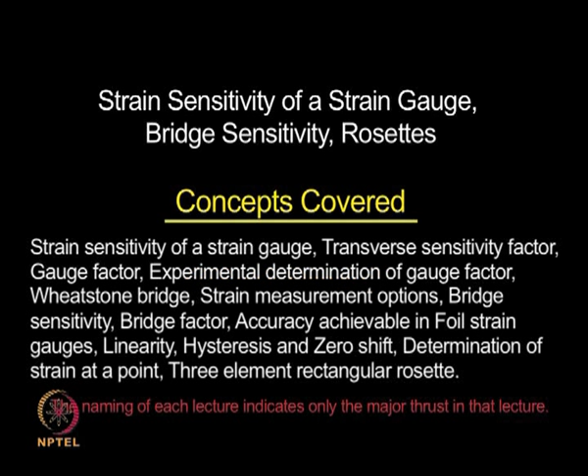We started our discussion on the method of strain gauges to measure strain at a point. You need a material with very high resistance so you can take a small speck of material and find the strain at a point of interest. I need a minimum length of wire to get changes that can be measured, but a long wire cannot be pasted on the specimen directly. I have to make it as a loop, a grid, to make a strain measurement. A single strain gauge only provides a component of strain along its gauge length. To measure strain as a tensor, say on a free surface, I need 3 independent quantities, so I need at least 3 strain gauges to measure the state of strain at a point.

You need to understand these two differences. In the last class, we developed the strain sensitivity of a single conductor, to understand the role of various parameters. I also mentioned that in strain gauge instrumentation, any thermal influence needs to be looked at very carefully, since we are measuring very small quantities. So any small changes can have a significant effect. Now we look at the strain sensitivity of a strain gauge.

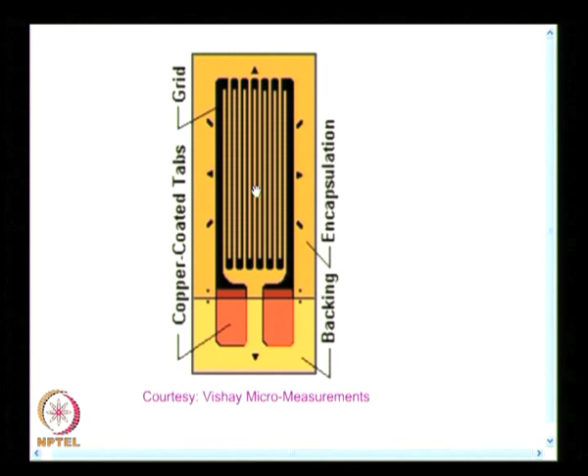As engineers, we need to bring in approximations. First observation is whatever resistance change dr by r occurs will be a function of the axial strain, the transverse strain, as well as the shear strain. In many problems we first neglect the shear effects, because shear effect is always there but its influence is quite small. So as a first approximation, let us neglect it and proceed; we will follow the same route here also.

In general, dr by r is equal to S_a into epsilon_a plus S_t into epsilon_t plus S_s into gamma_at. Note how the subscripts are denoted here: I use a small letter a, so the moment I use this, I am talking of a strain gauge and not a conductor. For the conductor, the axial sensitivity is given as S capital A. When I take it as a grid, the axial sensitivity is given as S_a. But even this kind of expression is not convenient for users.

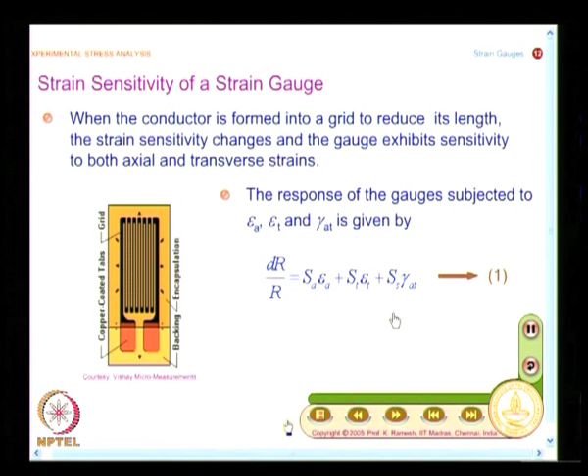I caution, when you are doing a strain measurement, you are talking of micro strains, which is 10 power minus 6, and you will also have to measure the change in resistance, which is again 10 power minus 6. So it is a very small quantity. If you recognize this fact, it will go a long way in respecting the procedures given by the manufacturer, because many times you do not want to follow a procedure, you want to quickly go and make a measurement. That will not do when you want to do strain gauge instrumentation. You should know what are the constraints that you have.

Now we look at how we simplify the set of expressions. As I said earlier, we start with the first approximation that shear effects are neglected, so Ss is small and can be neglected. We have also done one more modification: we have taken out S_A from this and brought in another factor called K_T, defined as S_t by S_A. This is just out of convenience, and what you find here is the change in resistance to the resistance of the gauge is now equal to S_A into epsilon_A plus K_T epsilon_t.

If you go and look carefully at the specification given by the strain gauge manufacturer, he would provide you what is known as a gauge factor. He will also provide you the transverse sensitivity factor. That is how manufacturers give out their parameters defining the strain gauge, and that is where you have what is defined as K_T. Typically we want to keep K_T as small as possible while designing the grid. We will also see later, by making K_T almost equal to the Poisson ratio of the base material, you can have what is known as a stress gauge.

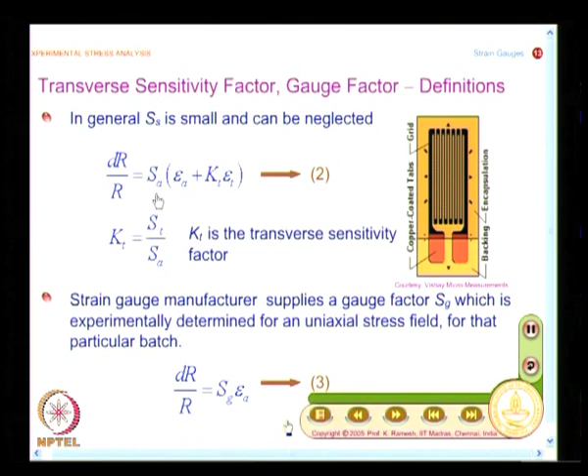And we have to look at what is the interrelationship between Sg and Sa. This Sa, St, Ss comes directly from our understanding that we take a conductor, perform an experiment, pull it, and then determine the strain sensitivity. Now you adopt the same thing for a grid. The grid is sensitive to axial, transverse as well as shear. So you bring in three factors, but from the user's point of view, he does not want to look at all these quantities. He wants a much simpler expression, also given by the manufacturer, where he simply says dr by r equals Sg into epsilon_A.

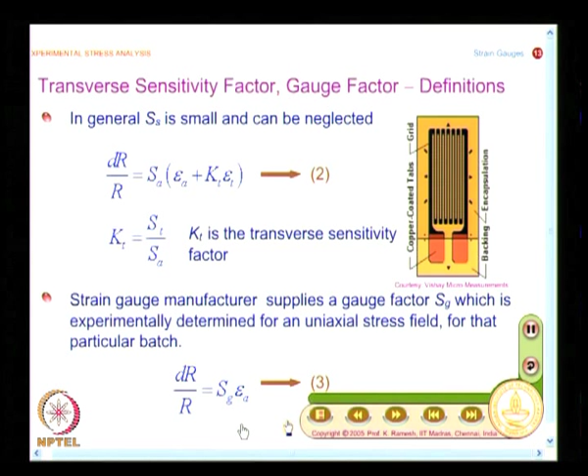Once you use this expression, you should know what are the constraints behind it, because Poisson's ratio has a role to play in all the experimental technique. What does the manufacturer do? He takes a cantilever, puts the strain gauge, and for a given load or a set of loads, he would find out the strain. From the analytical solution, he would be able to correlate and establish the parameters.

When you do an experiment like this, the Poisson ratio of the calibration material comes into play, because I have always said a cantilever beam experiences uniaxial stress but biaxial strain, you should never forget that, and the transverse strain is controlled by the Poisson's ratio.

So, without your knowledge, Poisson's ratio enters into your strain gauge instrumentation. It is very important. If you only use the equipment and read the strain, you miss out how the whole technology is developed. You should know the theory behind it.

Since I know the axial strain, I can find out the transverse strain simply as epsilon t equal to minus nu naught epsilon A, and for the calibration beam material, nu naught is given as 0.285, and you get an expression for Sg as a function of axial sensitivity and transverse sensitivity, the transverse sensitivity factor. So, I have Sg equal to Sa into 1 minus nu naught kT.

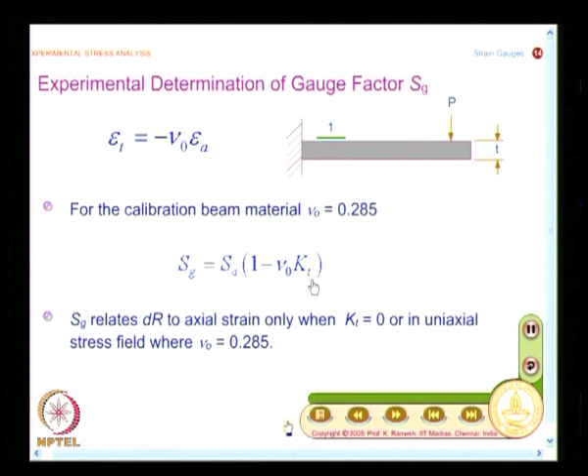I have been saying that you need to measure very small quantities, and how do you measure the change in resistance? In your high school physics you would have seen the use of a Wheatstone bridge. It is a very popular and simple, yet robust, method of measuring small changes in resistance.

And what you have here, I have 4 arms of the bridge. I have arm AB, BC, CD and DA. And what I do is I supply voltage between the points A and C, and I measure the potential difference at points B and D, that is what I measure.

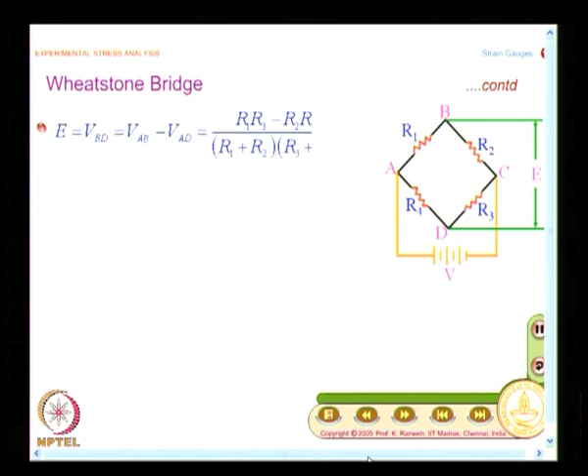In your earlier class you would have also seen how to find out the voltage AB and voltage AD, and these are given as these expressions, but our focus is different. Our focus is what happens when the resistance changes slightly.

Whenever I do any instrumentation, I initially balance the bridge, and while balancing the bridge I essentially make E equal to 0, that is VBD equal to 0. That gives me an expression, VBD as R1 R3 minus R2 R4 divided by R1 plus R2 into R3 plus R4 into V. When I make E equal to 0, this gives me a condition R1 R3 should be equal to R2 R4.

So, when I construct a Wheatstone bridge, I need to maintain this relationship. What should be the individual values of R1, R3, R2, R4, which would give me an optimal response of the Wheatstone bridge? I would like to have an optimal response, because I am measuring a very small quantity. So, I must look for every single effort to maximize the signal.

If I have to maximize the signal, I should understand how a Wheatstone bridge functions, and I should also bring in my understanding of solid mechanics in strain gauge instrumentation. So, the first condition shows when the bridge is initially balanced, I get an interrelationship between the resistances. We will see further what way R1, R3, R2, R4 should be by looking at the performance of the bridge.

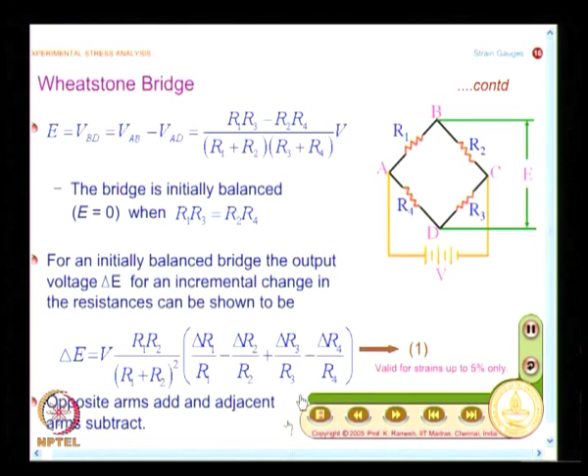And this, if you want to maximize, I can make this minus to positive. If I have opposite strains on adjacent arms, I can make this quantity equal to 4. So that way I will amplify my signal. The idea is you are measuring a very small quantity and we should always look for ways to increase the signal output. This is also one of the requirements, particularly in transducer design, they would have this bridge factor as 4. So now we look at the performance of the bridge.

Before we go into that, we look at what are the strain measurement options and then we will go and optimize the bridge. What way can we do this? I can measure the change in EMF directly and relate it to strain. This is useful for both static and dynamic strain measurements, absolutely no difficulty.

But for me to do that, the bridge has to be initially balanced before making any strain measurement. So this is very important. Initial balance of the bridge is a very important criterion, and this becomes very significant when I have thousands of channels. I must have electronics and multiplexing type of situation where I am able to balance and then start doing my measurement. That is where the instrumentation is now focusing.

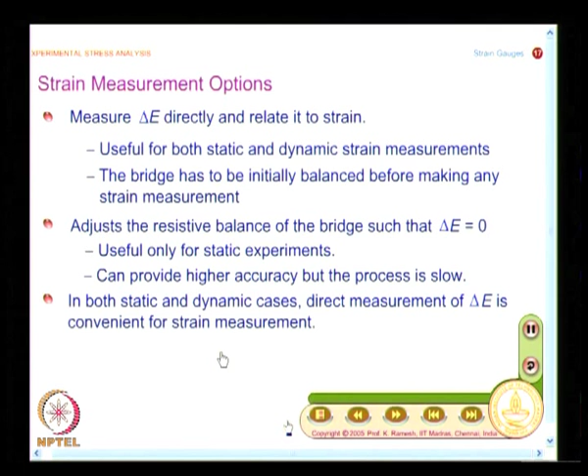The other approach is to adjust the resistive balance of the bridge such that delta E equals 0, but it is slow, it will take some finite time for you to do. This is good for static experiments, but it can provide higher accuracy. Nevertheless, for both static and dynamic cases, direct measurement of delta E is convenient from a practical viewpoint, and that is what we will try to do. So now we will go and look at how I can improve the signal from my Wheatstone bridge.

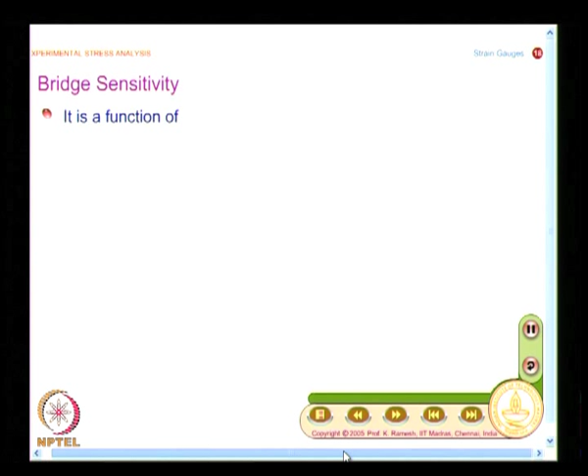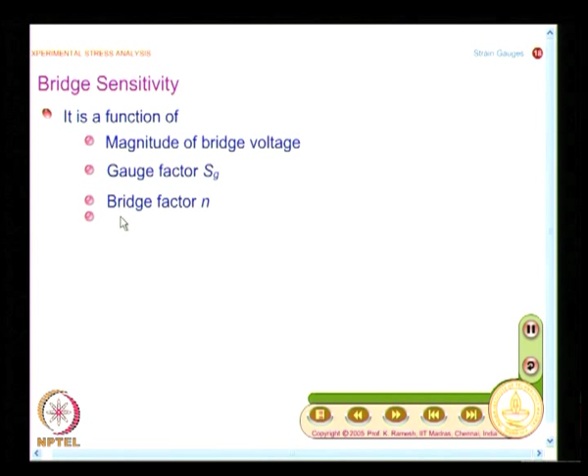So, I have the bridge sensitivity, it is a function of magnitude of bridge voltage, gauge factor Sg, bridge factor N and the ratio of resistance R2 by R1.

See, what we want to look at is, your initial balance only gave me a condition between the resistance. Now, I will find out for maximum sensitivity, what should be the value of the ratio R2 by R1.

And we write this expression delta E in a much convenient fashion. I have this as V into R1 R2 divided by R1 plus R2 squared, and the long expression is replaced by n, which I call it as a bridge factor, and you are essentially measuring delta R by R.

And delta R by R can be replaced by Sg into epsilon. So, if I have to maximize my delta E, one can also say I will have a very large value of Sg.

This is one of the focus in semiconductor gauges, but if I want to measure strain both in elastic and plastic regions without altering the instrumentation, we have seen it is desirable that gauge factor is around 2. So, most of the problems, whatever the strain gauge that you have, you will find the gauge factor is around 2, 2.1, that is how you will have it.

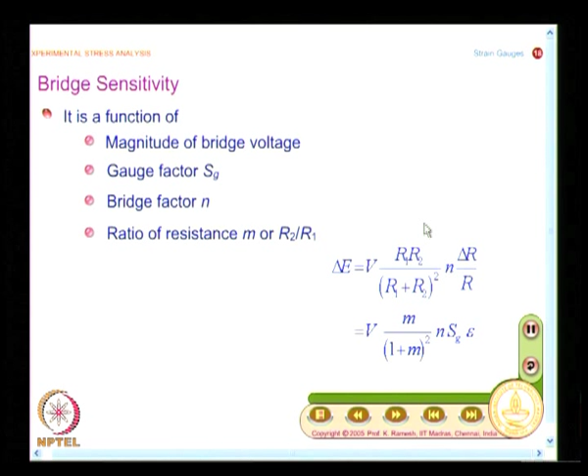And if you look at the current capacity is very small, we are only sending 0.1 ampere, and then the voltage that you are going to energize the bridge is only between 3 to 5 volts, you are not supplying a very high voltage. So, it is a very small voltage.

So, now what I will have to do is, with these constraints I must maximize this term m by 1 plus m whole square. So, if I look at its variation, how does it appear?

So, what I have here is for constant voltage and bridge factor n and the gauge factor Sg, you find the ratio m by 1 plus m whole squared reaches a value of 0.25 when m equal to 1.

So, what does it translate to? You want 4 arms of the bridge to have equal magnitude of resistances. So, that is how we will construct a Wheatstone bridge.

And we also have configuration where I will just use only one strain gauge, or I use 2 strain gauges, or I use 4 strain gauges. That is how I will make the bridge depending on the requirement. So, when I do that, I will be essentially playing with the factor n.

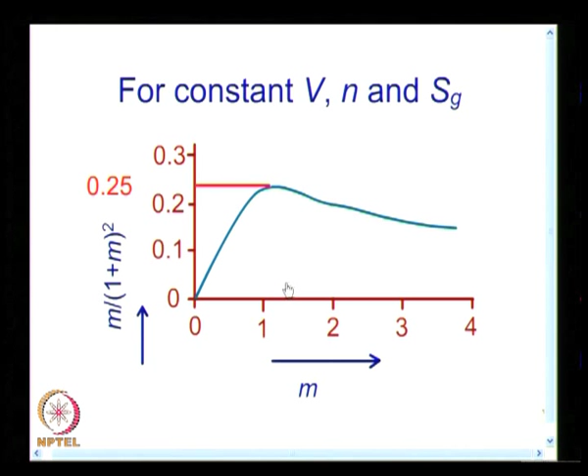So, if you want to have a better sensitivity for the bridge, ensure that each arm of the bridge has same resistance to start with.

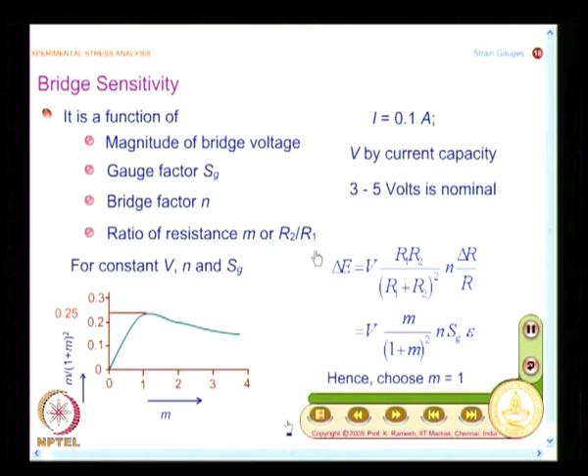And another caution is, we will also have a discussion later, connecting only one strain gauge poses lot of difficulties. So, it is better to avoid a quarter bridge configuration from minimizing the role of thermal influence. We will see that in detail later.

And there is also a via media. If I have to use only a quarter bridge, how do I reduce the errors? We will look at a 2-wire circuit and 3-wire circuit. A 3-wire circuit will minimize the thermal influence significantly.

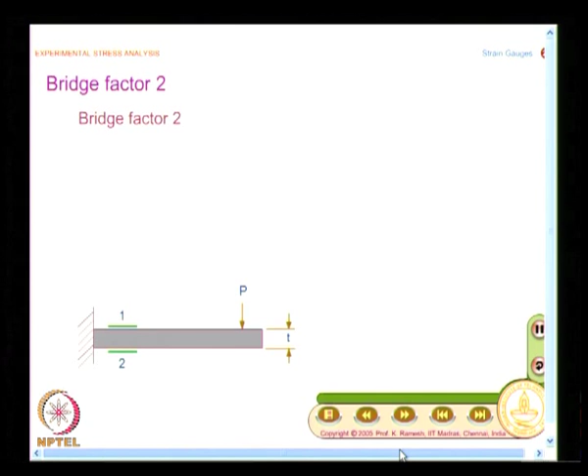When I have only one strain gauge, what happens? The bridge factor is only 1, and this is good enough for strain measurement, but when I go for transducer application, I always go for a full bridge to find out the maximum signal, and here I have a bridge factor of 2, and you bring in your understanding of solid mechanics here.

What is done here? Suppose I connect strain gauges on the top surface and bottom surface to opposite arms, what would happen? For any load, I will have 0 strain. You should not think that my strain meter has gone bad. It is not so. It is how you have connected the strain gauge to the Wheatstone bridge. It is also equally important. In strain gauge instrumentation, how you place the strain gauge and how they are connected in a Wheatstone bridge, both are important.

In most strain measurement scenarios, what do you do? You decide that this is the critical location, so I invariably put a single strain gauge and connect it to my Wheatstone bridge. You may essentially use a quarter bridge. Only in situations where the signal is so low that you want to amplify it, you may find methodologies to amplify the signal.

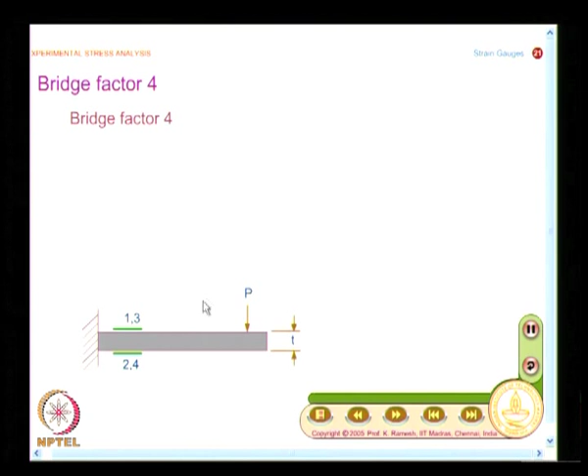Suppose I want to use bridge factor as 4 with the same cantilever, how can I go and do it? I can paste, instead of one strain gauge on the top surface, 2 strain gauges on the top surface and connect them appropriately.

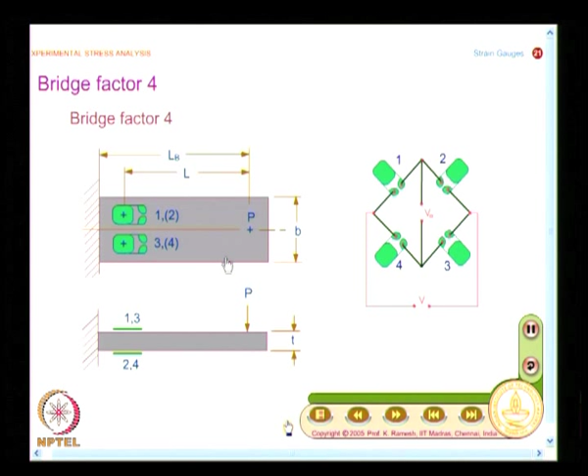This is very important, and you will be tested in the examination on this aspect, because pasting the strain gauge requires applying principles of solid mechanics - you should know how a beam behaves. You should know that when the beam bends, the top fiber will be in one state of stress and the bottom fiber will be in an opposite state of stress. And how they are connected is a very important and subtle piece of information in strain gauge instrumentation.

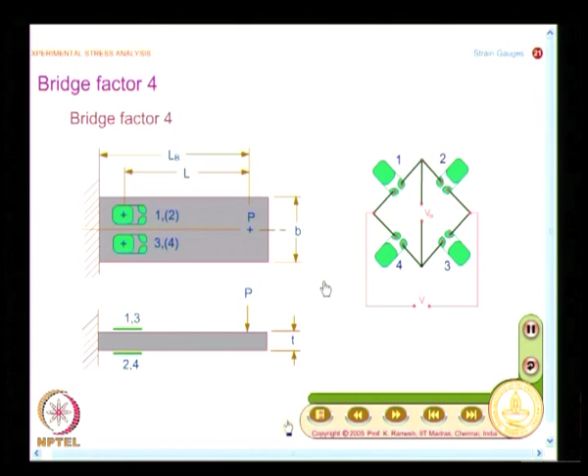I am going to give you one more example, which I leave as a home exercise. I have taken a shaft under torsion, and I want you to identify how to place strain gauge 1 and 2, how to place strain gauge 3 and 4, and how to connect them in the Wheatstone bridge to measure the torque.

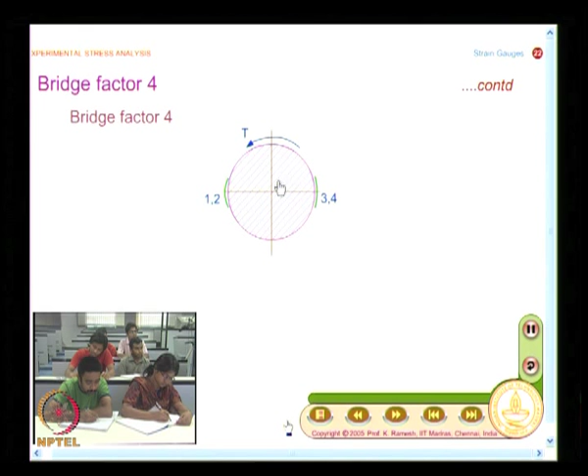You have to notice a strain gauge measures strain along its gauge length. So when deciding how to place the strain gauge to measure torque, you should also look at what alignment to use when pasting. All this knowledge you have to get from your basic understanding of mechanics of solids. You should understand how a pure shear state can be expressed, and use that knowledge to identify the orientation for pasting.

Not only this, how do I connect it? It is very tricky, people can make mistakes in this - how to align the strain gauge and how to connect it on the Wheatstone bridge. So I leave this as a home exercise, and we will see in the next class what answer you have got.

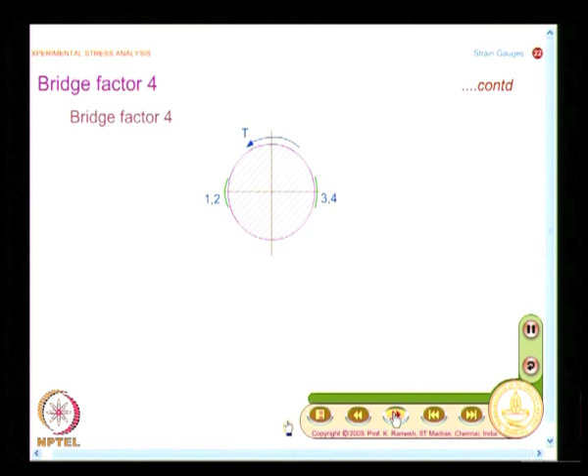What I have been mentioning is strain gauge instrumentation. We are looking for measuring small quantities, so we have to pay attention to every minute detail. We looked at strain sensitivity of a conductor, then graduated to strain sensitivity of a grid, and then we also looked at bridge sensitivity. In bridge sensitivity, we understood that if I do a strain gauge instrumentation, each arm of the bridge should have the same resistance to start with.

Using the principles of solid mechanics, I can have a bridge factor up to 4. This may be good enough in the case of transducer applications. In normal strain measurement, you may paste just one strain gauge. And what is the level of accuracy that we can think of? This depends on what way we get individual accuracies of the various factors influencing the strain gauge instrumentation.

And what is the accuracy achievable possible? Foil strain gauges can be produced with gauge resistance accurate to plus or minus 0.3%. And one of the first steps in strain gauge instrumentation is you would measure the resistance of the gauge.

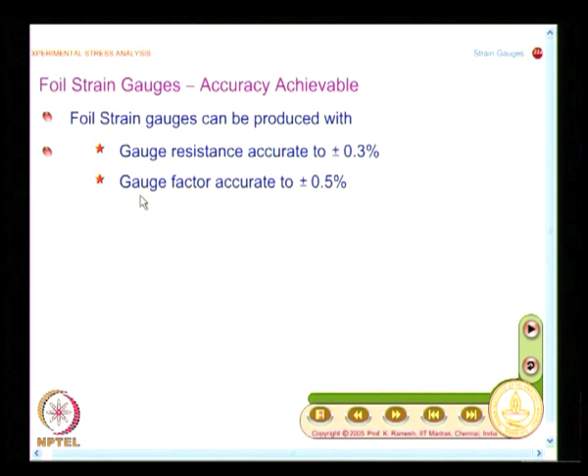You also need gauge factor measurement, because you may have to set the knob of your strain gauge instrumentation to the gauge factor, because gauge factor essentially works like a multiplication factor, and if you do not set the knob properly, you will not be able to interpret the strain. Gauge factor can be obtained with an accuracy of plus or minus 0.5%, reasonably good. In the case of brittle coating, the failure strain accuracy is only plus or minus 20%. So in strain gauge instrumentation, the accuracy levels are much higher.

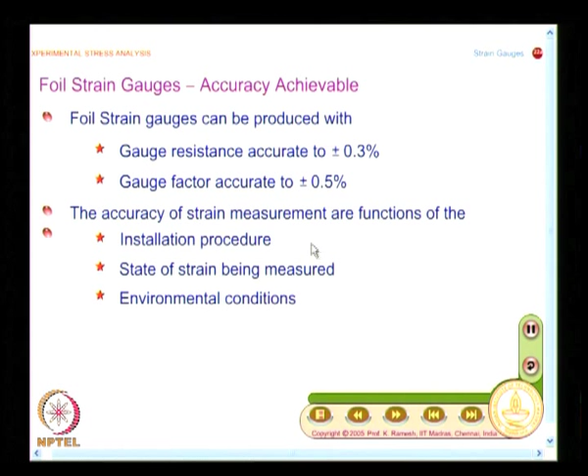And the strain measurement accuracy depends on what factors. Though I get the gauge resistance and gauge factor very accurate, if I do not do the installation properly, my entire strain gauge instrumentation can be faulty. Installation is a very important step, and you need trained technicians to do that. So this is one factor.

The second factor is what is the state of strain being measured. We will also see different types of strain gauge patterns that will give you an indication of how the problem becomes complex when I have to find out what I should do. Suppose I have a bending scenario, what type of gauge configuration I should use, I have to select.

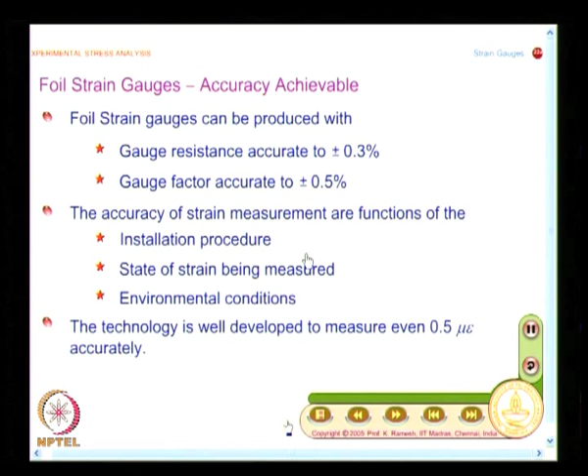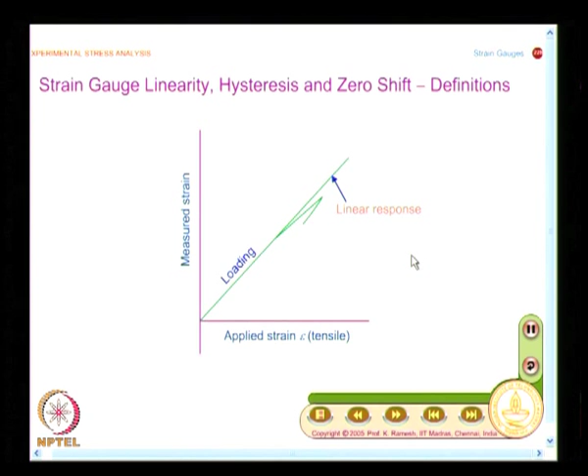And finally, your environmental conditions. You have to take special precautions in aggressive environments. And what you will have to keep in mind is accuracy in measurement is closely related to technology, and you should be happy that technology is now very well developed to measure even 0.5 microstrain accurately. That is an achievement. For you to get that, you need to be very careful about installation and all the other recommendations that the manufacturer asks you to do.

And there is also another aspect which you will have to look at: what is the strain gauge linearity, what is hysteresis, and what is a zero shift. You would like the loading and unloading path to be the same, but in reality the loading and unloading path can be different. That constitutes what is known as hysteresis, and when the load is reduced to zero, you may have some apparent strain, it may not necessarily come to zero, and this is called a zero shift.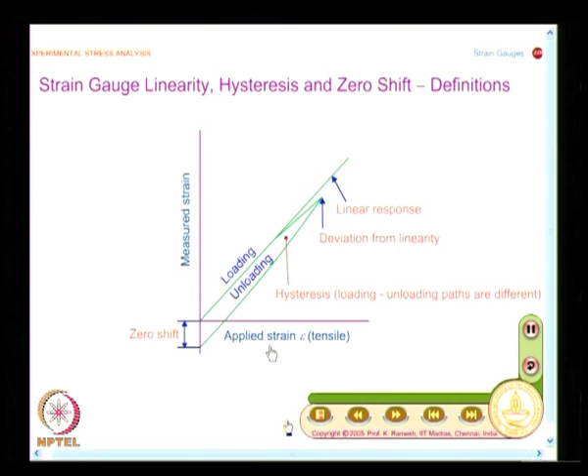Now we come to the very important aspect: how do I measure strain at a point? This I have been mentioning many times. A single strain gauge can give only the strain component along its gauge length.

In many applications, one wants to measure in-plane strain on a free surface. Mind you, suppose I want to go and paste a strain gauge inside a pressure vessel, I want to know how the inner surface is stressed, then I need to bring in certain correction factors. What happens there, when I paste a strain gauge, you have fluid pressure acting on it.

So we will postpone how to analyze strain data in those class of problems for later. First we are looking at, suppose I have a beam that is bent, it has a free surface, I paste a strain gauge and find out what is the strain on the surface. The strain gauge as such is not loaded externally, whatever the strain of the base component is faithfully transferred through the adhesive backing system to the strain gauge.

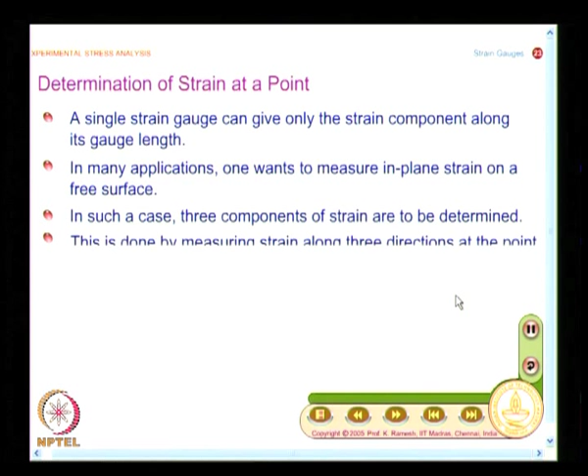So we want to find out in-plane strain, and I need 3 components of strain to be determined. Here you look at strain as a tensor of rank 2 and you bring in the tensorial transformation law. So what I have, I need to find out 3 components of strain. I need to have 3 strain gauges oriented at angles theta A, theta B and theta C.

And you have to bring back your old memories. How do you write strain along a given direction in terms of the tensorial components? That is a very famous expression that you have. You can take a minute to recall that expression and try to write it.

Strain tensor and stress tensor share commonality. The tensorial transformation law is similar, and if you know how to write this transformation law, your Rosette analysis becomes child's play. It is no longer Greek and Latin, because there the angles are well known. You are not taking arbitrary angles, you take certain fixed angles. So finding out how to get the strain at a point using a Rosette becomes very simple if you know the strain transformation law.

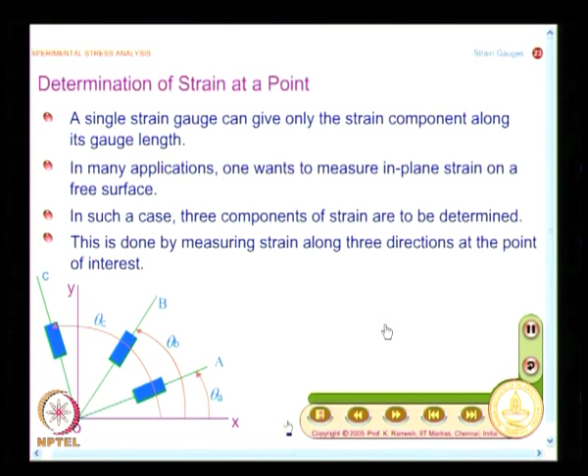I think some of you have written it, and the strain transformation law is very simple. That is what you have here. I can write it as epsilon j equal to epsilon xx cos squared theta j plus epsilon yy sin squared theta j plus gamma xy sin theta j cos theta j. I have written the engineering shear strain component. If you write it in terms of tensorial components, it is gamma xy divided by 2.

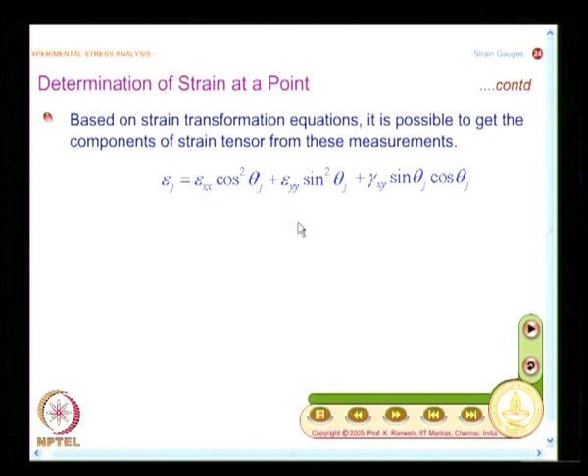And when I go to different Rosettes, the theta j will change. That is all the difference. So what do I do? I get strain from this expression, and if I use the elastic constants, I can also get the stress information. The theta measurement becomes very critical, and that is the reason why you have pre-aligned strain gauges.

They are mounted on a single carrier and they are called by a special name called Rosettes. You need these strain gauge Rosettes for finding out the strain tensor at a point of interest. The greatest advantage is they are pre-aligned, and because you are having a metal foil, it is easy to do this very precisely.

I have always been saying the basic information given by an experimental technique is dictated by the physics that we exploit. So in a strain gauge, you essentially employ the fact that change of strain modifies the resistance of the conductor, and I essentially measure a component of strain. Once I measure the component of strain, if I know the elastic constants of the base material, it is possible for me to find out the stress on the specimen by invoking equations from mechanics of solids.

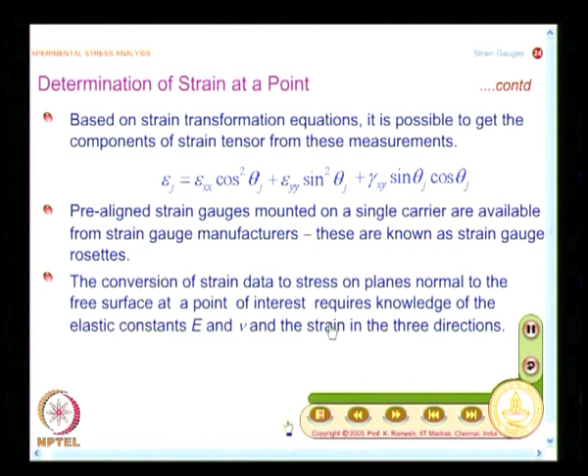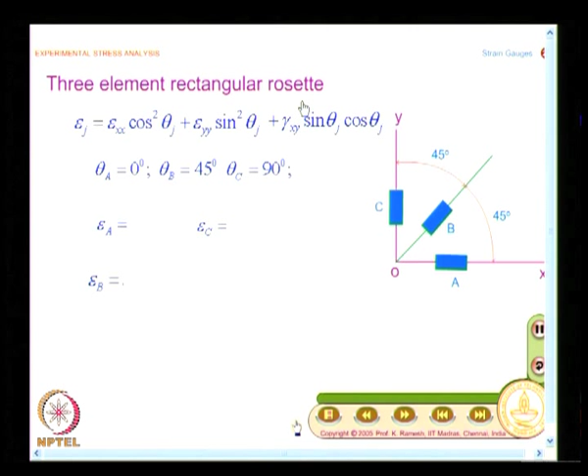Let us see two famous configurations of the rosettes. One of the rosettes is called a rectangular rosette. It is primarily because I have a strain gauge along the x axis, a second strain gauge at 45 degrees, and a third strain gauge along the y axis.

So what is the strain measured by strain gauge A? If I have this as my reference axis, I could simply say it is equal to epsilon x, and strain measured by strain gauge C is epsilon y. Now use this strain transformation law and find out what is the shear strain. So I will have epsilon A, epsilon B, epsilon C measured from the actual strain gauges, use them and find out what is the state of strain at a point.

See, you have to look at certain subtle things. When I developed the definition of gauge factor Sg, I also cautioned that you have a sensitivity in the transverse direction, given by a transverse sensitivity factor Kt. The moment I go to rosette analysis, I assume Kt equal to 0, and then write this strain transformation law and find out the strain at the point of interest. Later we will also see how you can bring in correction due to the transverse sensitivity effect on the rosette too. In that case the equations become very complex, and that is given by the manufacturer, who provides all this information also.

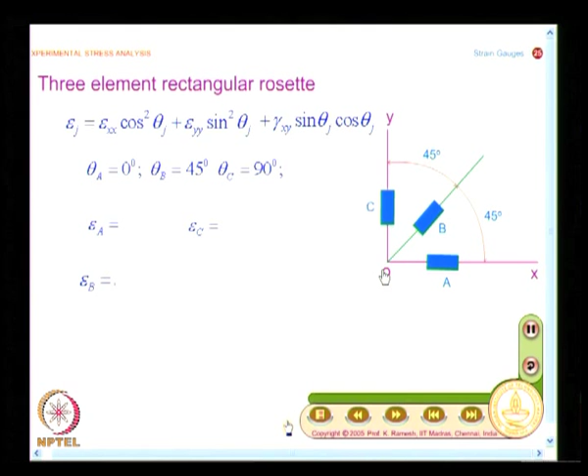First approximation is that I have a finite grid. We have looked at how the gauge length is going to affect your strain measurement. Now in a rosette, I have to be careful about how these strain gauges are aligned with respect to the point O. So keep thinking about these issues.

These are very important, because strain gauges are so versatile. People think that once they place a strain gauge connected to the strain meter, they look at the reading and go make fast conclusions. If you do not know the nuances in strain gauge instrumentation, you can be way off. I will show you an example where, if you have not accounted for certain parameters, a simple calculation can result in 20% error. So you have to know on which kind of component you are pasting the strain gauge.

In this class we started with what is the strain sensitivity of a strain gauge. Then we moved on to how to measure change of resistance. We said the Wheatstone bridge is the most celebrated type of measuring approach. Then we looked at the accuracy achievable in strain gauge instrumentation, and finally we had a brief discussion on how to find the state of strain at a point, and we have also seen what a rosette is. In the next class, when you come, we will get the shear strain in the case of a rectangular rosette.